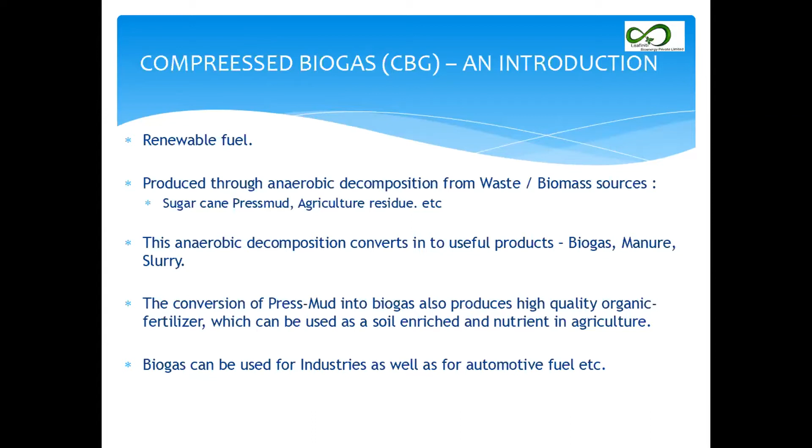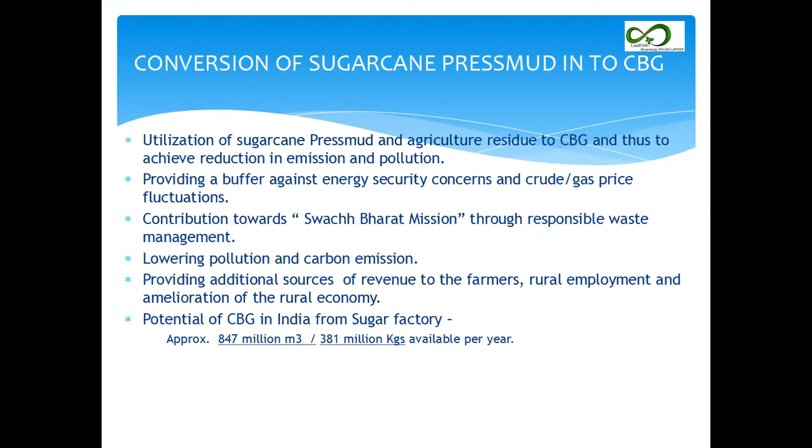The potential of CBG in India from sugar factories is approx 847 million cubic meters or 381 million kgs available per year. So this is how the sugar industry generates waste to energy in the conversion. Sugarcane goes to raw sugar and refined sugar. In this process, byproducts come out: bagasse, press mud, and molasses. Of these byproducts, the press mud is taken to the biogas plant, where it generates biogas and organic manure, and the biogas will be fed to the cascade system, feeding the auto industries and the power plant also.

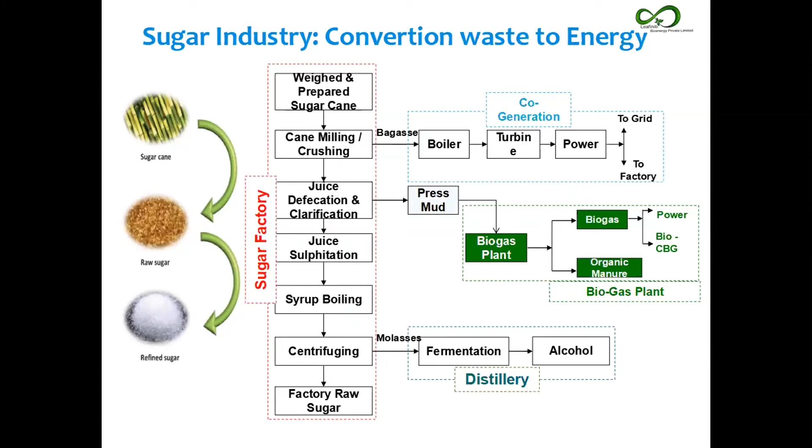This is the typical process diagram from Praj Industries and DVO Inc., which is established here. In this flow process, initially the press mud is pre-treated and stored. Here we are storing it on approximately 6 acres of land, around 66,000 metric tons capacity for consuming the whole year at a rate of 200 metric tons per day.

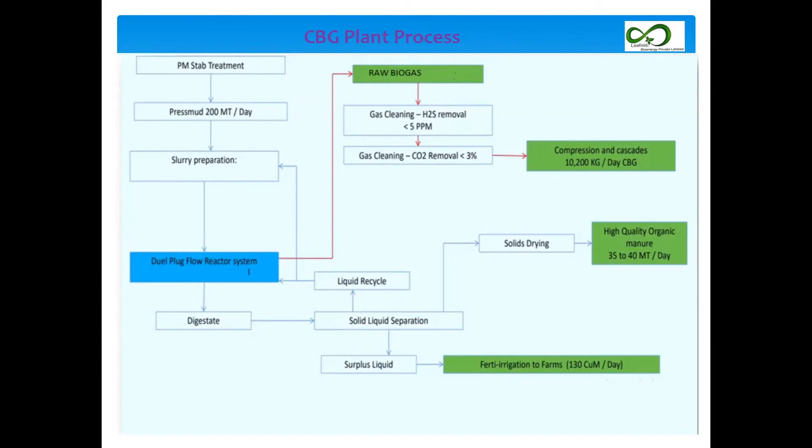This is the process description, how it moves from press mud to CBG. The treatment at the sugar mill uses stabilized press mud for its TCVS contents. Press mud can be stored for over 8 months without losing gas yield potential, allowing up to year-round plant operations. It will be covered with tarpaulin and stored. This is the composition: moisture content is 70%, total solids approximately 30%, and total volatile solids 23%.

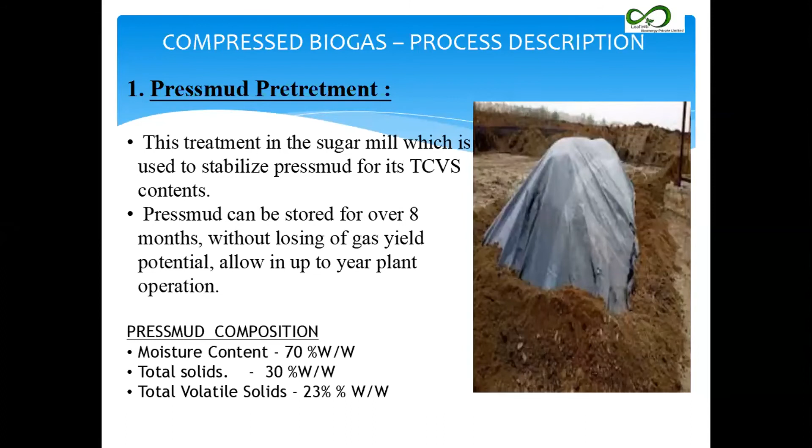Then feed preparation: the press mud is lifted from the storage section by front end loaders and conveyed by belt conveyor to the slurry preparation tank. The press mud is diluted with 80% recycled digestate and 20% fresh water to make the slurry to feed the digester.

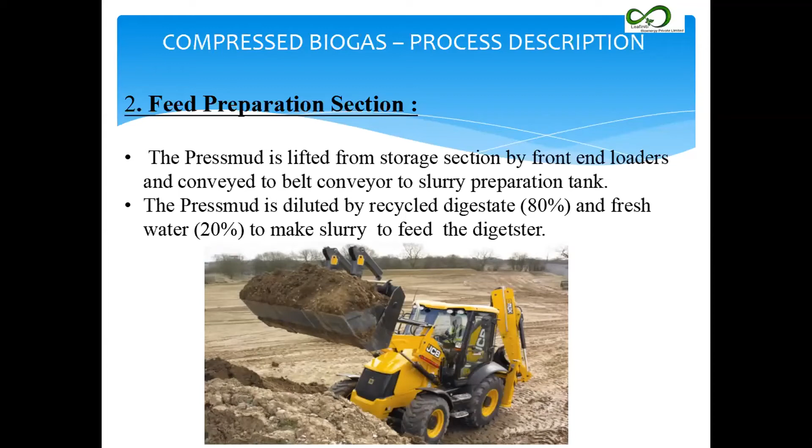In the anaerobic digestion section, a two-stage mixed plug flow anaerobic digester is used for the anaerobic digestion operation. This is a highly advanced design of anaerobic digestion process in which mixing is done by sparging a part of the biogas generated.

And the plug flow digester operates on the principle of continuous and uniform feed of press mud. This system has a specialized temperature maintenance system and wall mounted sparging systems with different compartments to give biphasic operation.

And this is constructed 1 meter underground and 4 meters above. So approximately the construction size is 75 meter length, 44 meter width and 5 meter height. Approximately the water capacity of the digester is 16,000 cubic meters.

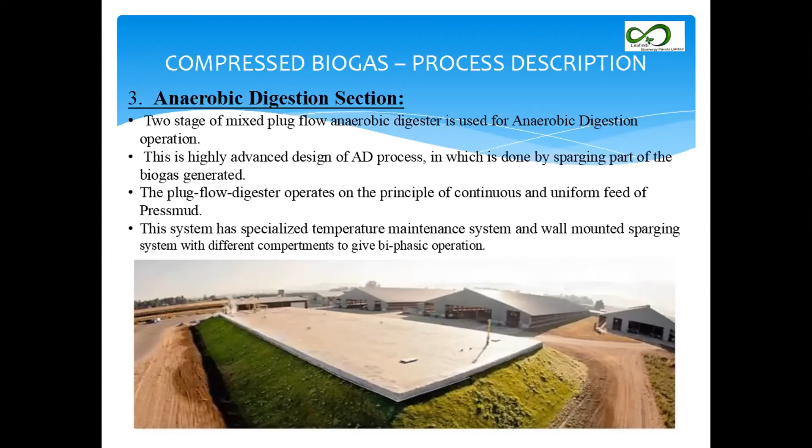Then the next stage is the gas upgradation section. The conversion of the biogas to CBG requires removal of impurities and concentrating the methane up to 96% before compression. The process removes the H2S, CO2 and moisture to purify the biogas to CBG.

The H2S removal is carried out. The catalyst in the aqueous medium is used for scrubbing hydrogen sulfide from the biogas. The sulfur present in the hydrogen sulfide is precipitated as elemental sulfur. The CO2 scrubbing process is based on the difference in solubility of CH4, H2S and CO2 in water.

The removal process is based on the membrane system; removal of the CO2 employs higher solubility of CO2 in pressurized chilled water as compared to CH4. After removal of the CO2 and H2S, it is passed through molecular sieves dryer to remove moisture.

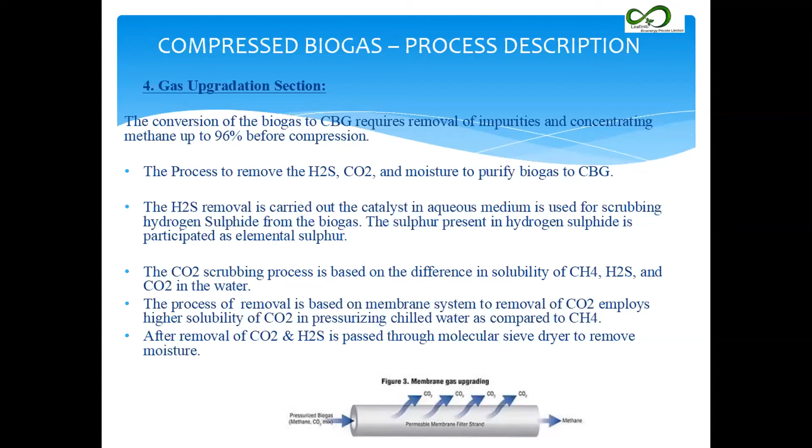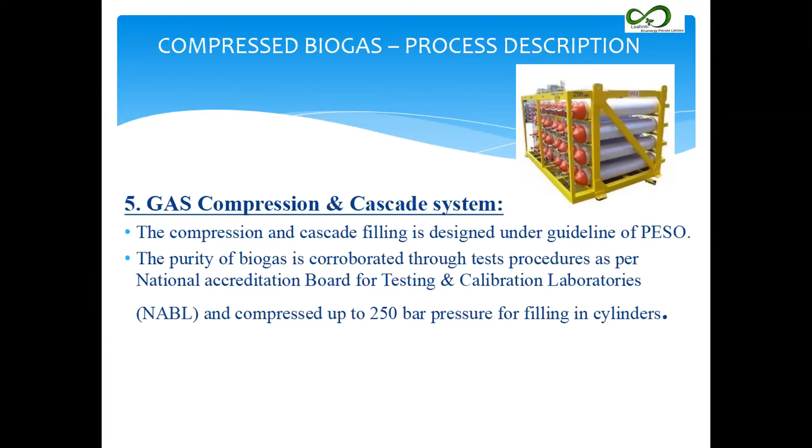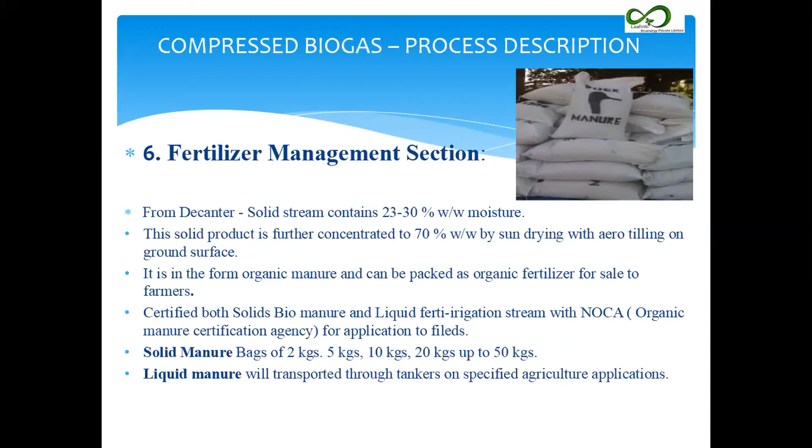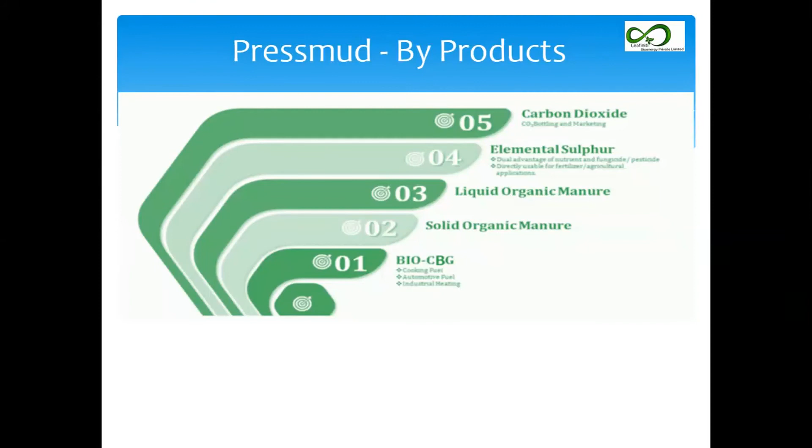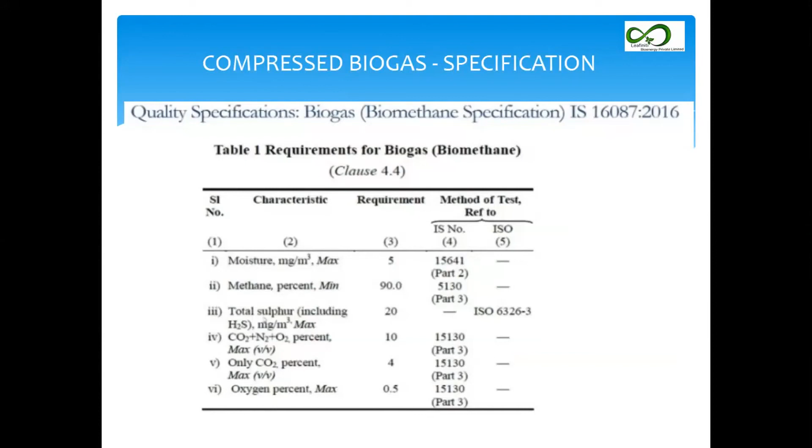And these are the guidelines, the quality specification of biogas as per IS 16087:2016 in the table: moisture max 5 mg/m3, methane minimum 90% and maximum 96%, total sulfur less than 20 mg/m3, CO2, nitrogen and oxygen less than 10%, only CO2 max 4%, and oxygen 0.5%.

So in conclusion, the press mud contains 77% volatile solids, lignin, lipids, hemicellulose, etc., which favors biogas production. The advantage of using press mud is that the sludge coming out from the digester is good fertilizer, and press mud can be used in combination with other raw materials to increase the efficiency. Other advantages are it is pollution-free, waste reduction, flexible use of biogas, etc.

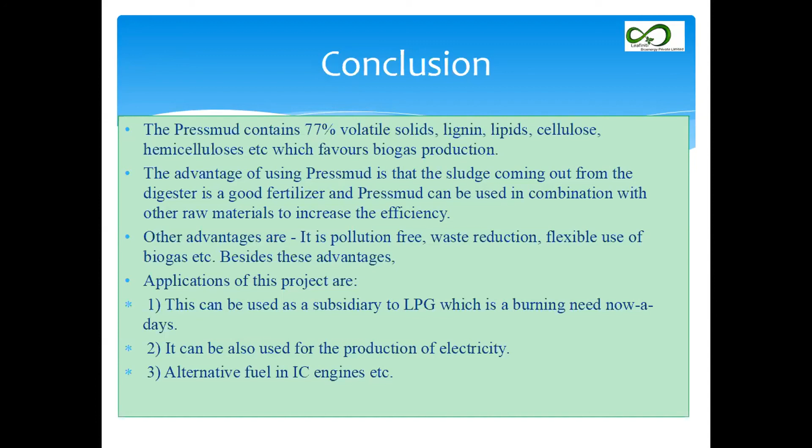Besides these advantages, applications of this project are that it can be used as a substitute for LPG, which is a burning need nowadays, and it can also be used for the production of electricity and as alternative fuel in IC engines. So this is one of the other products; we have started working on the conversion of tractor fuel from diesel to CBG.

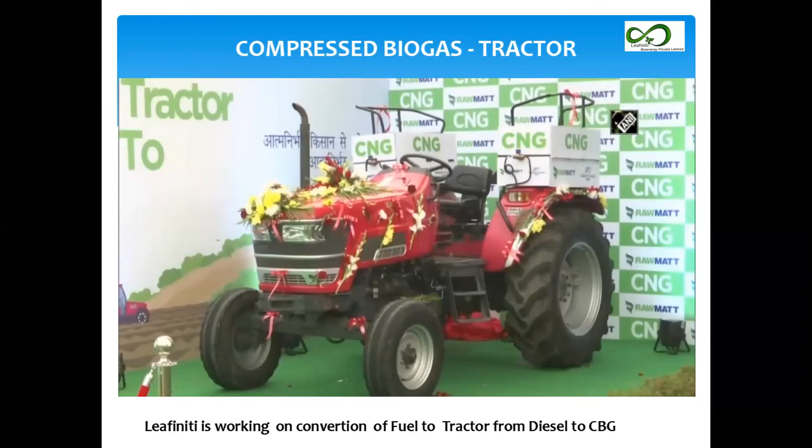When is this plant going to start? Around 50% of construction activities are completed, sir. So surely in the month of June, July, we will be coming up with the process plant commissioning.